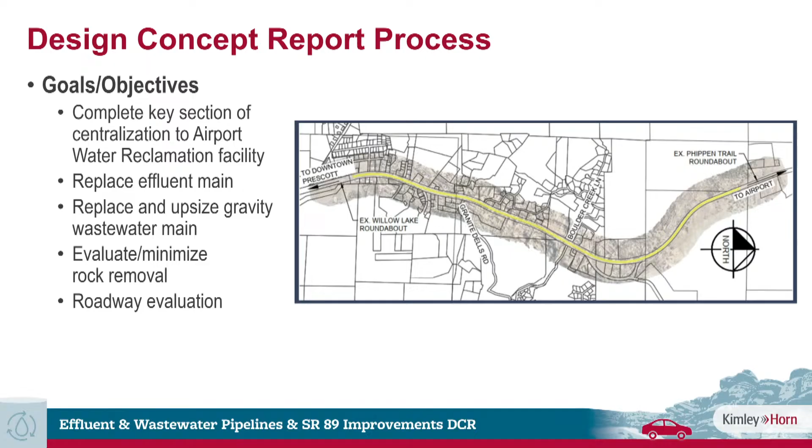So the design concept report process—as Gwen stated, we are about in the middle, or 2/3 of the way done. We are through the alternative development and evaluation stage.

First step is data collection: traffic, geotechnical, utility, topography, and existing right-of-way. We flew the job with a drone in December to lay out the ultimate topography. We have lined up all the existing right-of-way, so we know where everything falls in terms of existing conditions. Utilities we've mapped, using some of the breaks that occurred over the last year to actually map out existing utilities, as well as our geotechnical team to locate some utilities through the corridor. And traffic, we've done a significant amount of evaluation there.

Modeling and analysis, we're about 2/3 of the way done with that as well. We will be submitting a final traffic impact analysis and a final geotechnical report with the DCR. But we've got enough information right now to confidently present the alternatives recommended based on the data and analysis we've collected thus far.

We had originally scoped a minimum of 15 alternatives, but as we developed them, we landed ultimately on 20. The technical committee reviewed all 20 alternatives we put together, with weighted criteria by the advisory group, scoring by the tech committee, and 3 alternatives that scored the highest, as well as discussion on an additional alternative to be considered.

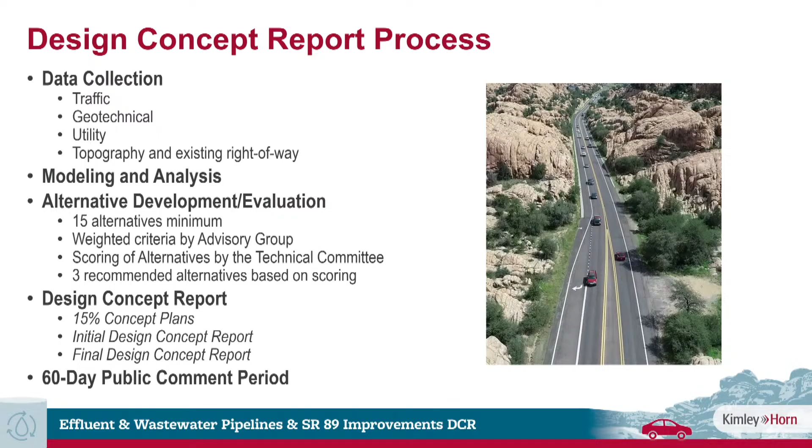The design concept report is the next phase. We will be submitting 15% plans for the 3 alternatives, an initial design concept report, then a final, and that falls within the window of the 60-day public comment period, which will occur later in the project. Any questions on that process?

The images on the screen right now are the 2 breaks that occurred last year. We know the pipeline is failing—it's been failing over the last 6 years. Two different types: the breaks are the same, but the impacts to the roadway are a little different. What we've noted is that this is Ameron pipe, a type of bar-wrapped concrete cylinder pipe subject to corrosion, which is not good when you're working with a wastewater line, an effluent line.

But we're also finding issues with how it was actually backfilled and bedded. As we expose these breaks, we're finding large, angular rock loading onto the pipe itself and causing these breaks from the outside. You can see the pipe on the left in July 2024—that pipe is shredded. Once it breaks, the pressure in the line starts to eat at it as well, but what we're finding is that it stems from the bedding over the top of the pipe.

The December '24 break impacted the roadway much more than the July '24 break. In addition to replacing the section of pipe that broke, the roadway was undermined so much that we had to close it and repave that section as well. It occurred in the narrowest section of the project, so to do the work we had to close the highway, as opposed to the July break where we were able to work within the highway while it was still operating.

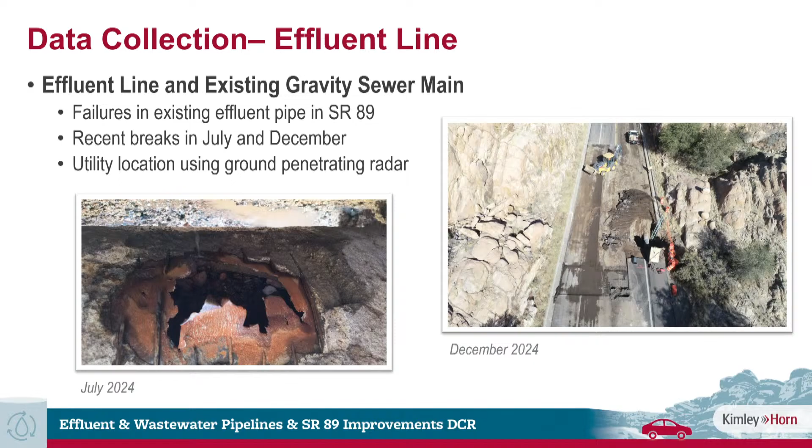What is on the left is one of the traffic tools we are using. It's called traction data. It actually tracks travel times throughout a specific corridor. And so we apply these routes to specific corridors that are going to be impacted by this project.

So obviously SR89, but we're also looking at Willow Creek Road as well. This segment is SR89 northbound from Prescott Lakes Parkway to 89A. What is shown in red and yellow along the bottom is a typical weekday where traffic duration to run this section of the corridor takes a little over 6 minutes. You can see a subtle peak in the PM, and I think it's the way the graphic is set up with the vertical axis going up to 15 minutes.

Along the vertical axis is duration, and along the horizontal axis is time of day. The colors in blue and green are the actual travel times while traffic was detoured and that main was being replaced. In the PM peak period, when commuters are coming home for the day, the traffic spiked up almost 15 minutes—a three-time duration along that section of the corridor, which makes sense, right?

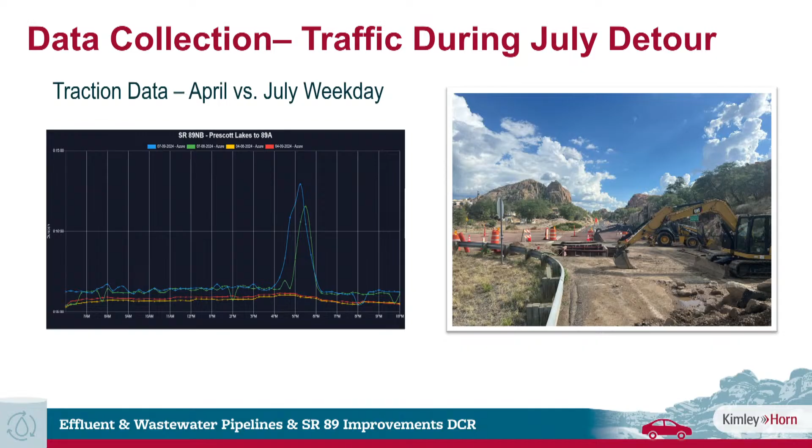We've detoured the road. We had to slow them down to about 5 miles an hour as you navigated that curve. But what we're using these detours for is to gather information in terms of projecting what it would be like as you start to rebuild a new effluent line, a new wastewater line in that corridor.

So these are snapshots in time of what traffic would look like if we have to run a detour condition to construct a facility that's almost 2 miles long, and you have to do that twice with the effluent line and the new wastewater. So we can gauge the impacts to traffic with replacing an effluent line and project that out as we look at maintenance of traffic and construction timeframes through the corridor. Any questions on that data collection or that graphic?

So next was a little different of a detour, to say the least. This was December when the entire highway had to be closed to patch up that section of the effluent line. We took our drones out there and captured aerial imagery of Willow Creek Road, which was ultimately what was posted as the detour route.

As you can see, and as expected, it was gridlock almost all the way to the highway to the north and south, all the way to Willow Lake Road. We also got out there and got traffic counts to look at the volume of cars that were rerouted, to see where traffic is choosing to disperse when we close 89.

There's obviously other routes you can take to get to your destination. You can take Willow Creek Road, which was what was posted, or you can go on Williamson Valley Road, perhaps Glassford. In a future slide I'll show, we were able to capture where traffic was going there.

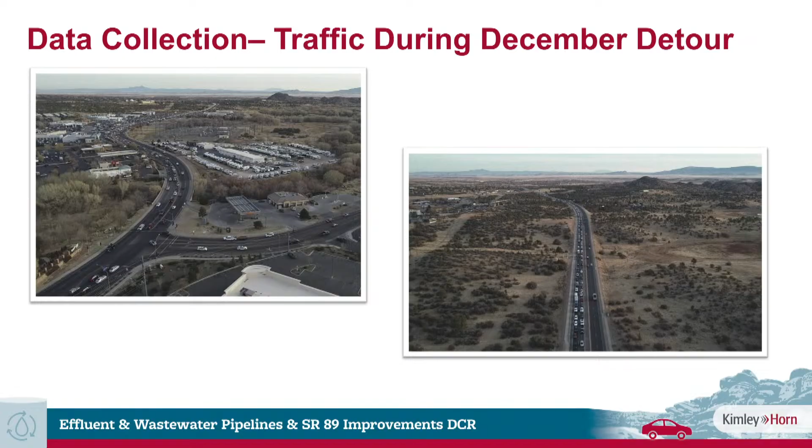So just a quick step back in terms of data collection that we're pulling. I'd already briefly mentioned the data we were collecting during those detours. But we use a series of tools to get a whole picture of the traffic through the corridor. Number one is traffic counts—very simple. Count the number of cars in a peak hour, in a day, and start to look at big picture level of service on a roadway.

As we get to D, E, and F, flow goes from stable to unstable to forced flow, and that's when we start to hit gridlock. Unstable flow is when you can have a corridor with enough capacity in the highway itself—and that's what we're finding with this section—but there is little to no room for side streets to get access. Once those cars make their way into the queuing on the highway, you can see the instability of that network, where one car can really impact traffic upstream.

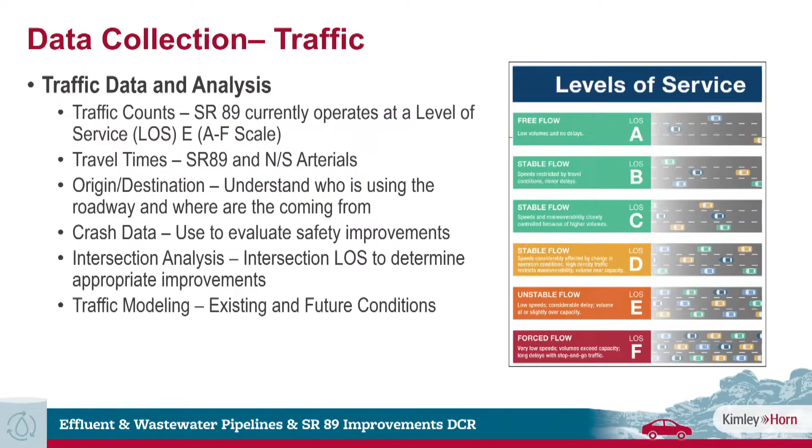That happens two or three times down a corridor, and now you're into this forced flow and gridlock condition. So where we're operating right now with the existing highway is at level of service E, that unstable flow where you're driving the corridor in the morning with a car maybe one second ahead of you. You feel like you're in free flow, but there's no gaps for other cars on the side streets to connect to that roadway. We're running out of capacity, and we'll talk through overall level of service based on our counts. Any questions on level of service and how that relates?

Did you compare your analysis with the CYMPO analysis published five years or so ago? Yes, that's a couple slides from now. I'll go through the comparisons. Their estimate of growth and traffic growth, I think, was a little overly conservative. Because we're already hitting the 2030 levels already.

Yes, and that intersection of Willow Lake and Willow Creek - I made this comment publicly and even in some of my comments in the Courier - if you want to know what we're going to be looking like in a couple of years if we don't widen 89, then that three or four signal light change trying to get through the Willow Lake, Willow Creek intersection is going to be a common occurrence. And when that happens, people get desperate to try to get to work on time or some other reason, and they start making really dangerous traffic moves. So I think there's no doubt in my mind that we have to have a widened section there.

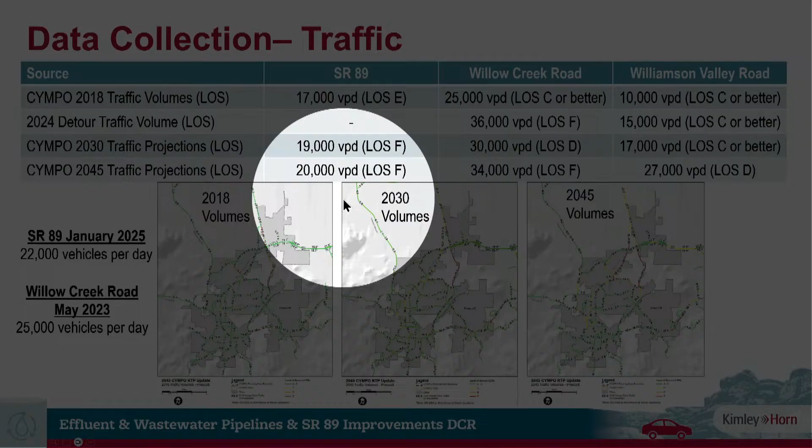Now I'm going to use this, which I just learned how to use today — should be fun. What I'll point you to is the SR89 numbers in terms of the CYMPO projected model for 2045, which is 20,000 vehicles per day. What's shown in the table at the top is 2018 volumes taken at that time, projecting out to 2030 and 2045. In the middle are the 2024 detour volumes I discussed. As you look at it, in 2045 they projected 20,000 vehicles, but we're already counting 22,000 vehicles in January of 2025. So we've exceeded the 2045 projected volumes on SR89.

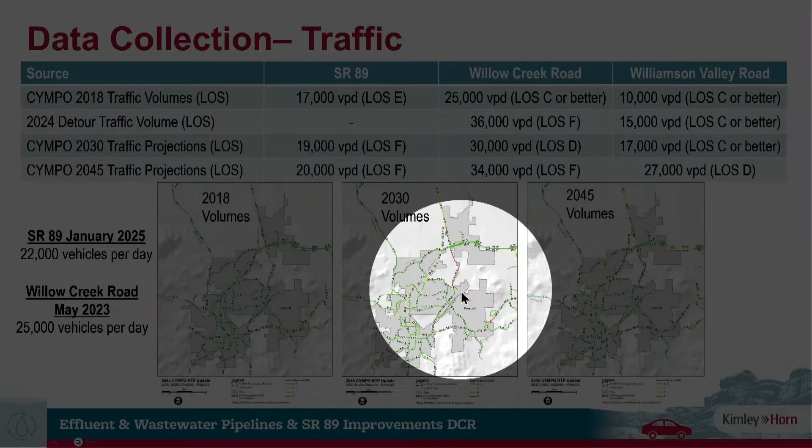This was mapped out — one day I'll get good at this, first time learning. Right here we're looking at the color codes again for level of service D, E, and F. This is looking at 89 and Willow Creek Road, the two primary north-south corridors for traffic volumes.

CYMPO was projecting that by 2030, 89 was already going to be at level of service F, and Willow Creek Road was going to be close behind in those projections too, getting close to 34,000 vehicles by 2045. Interestingly, during that detour we counted 36,000 vehicles on Willow Creek Road. So while we closed a major north-south route, what travelers experienced was a failing roadway that's projected in a model that is conservative at best.

I think Ian Mattingly spoke of this a year and a half ago — not only thinking of your highway in terms of north-south movement around one corridor, but looking at all your north-south capacity across all arterials and highways. You're running out of volume and capacity on those roadways, and that's evident when we have to close two lanes of travel — you're at gridlock on your major arterial coming through town.

So we're looking at this not only in terms of traffic, but what's going to happen when we have to build the needed infrastructure — the effluent and wastewater line. That has to happen. You have to build it within a section of existing roadway, and you have to do something with traffic.

Again, to the mayor's point, we tracked 36,000 vehicles, so they added 11,000 of the 22,000. Williamson Valley Road saw an additional 5,000 during the detour, so the rest likely went down 69. The remaining 6,000 to 7,000 were using 69, which was under construction, and perhaps they went down Glassford and overloaded that roadway as well.

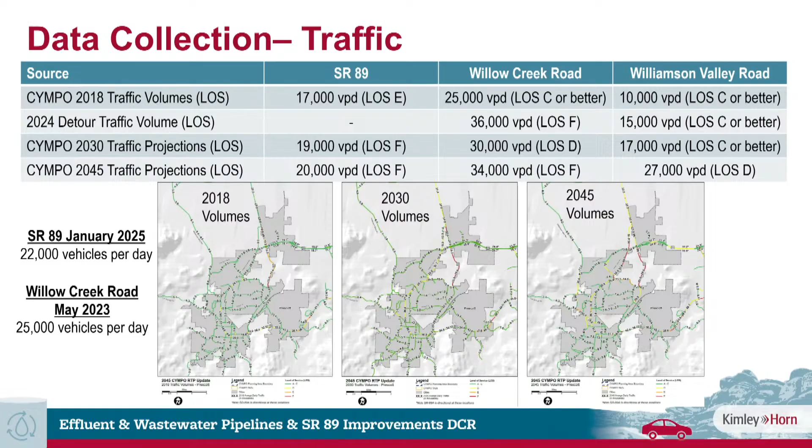Part of the problem is you're connecting a 4-lane arterial to a 2-lane highway with a 2-lane roadway, and often that gets overtaxed trying to reroute traffic. We saw that when looking at detours - northbound travel detouring on Willow Lake Road was severely congested in the PM. Then on Willow Creek Road northbound with 2 lanes, it was more free-flowing. So you have capacity concerns when you link 2 major roadways with a smaller collector street - you create a bottleneck, and that's what Willow Lake Road serves, especially at that intersection.

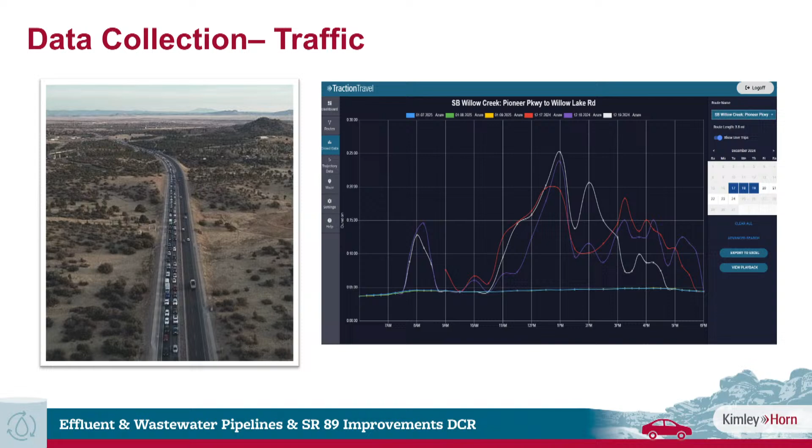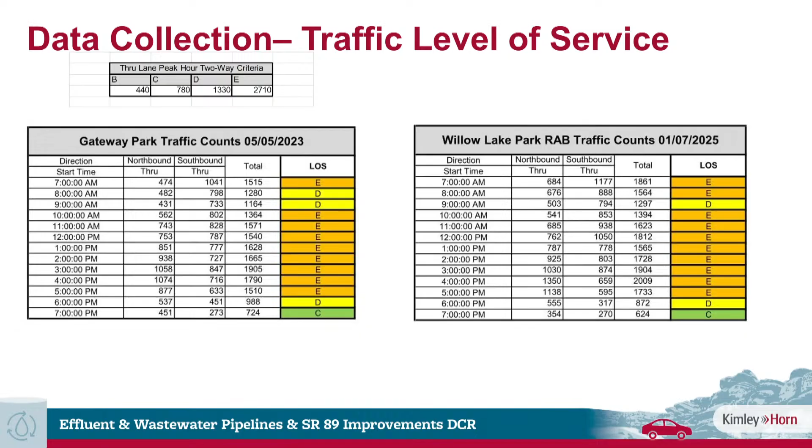So we did counts in May of 23 as part of the analysis for the potential future park. And then we did counts again in January 25, very similar in terms of volume, but you see we actually have an E that lasts a little longer into that 8 to 9 window on the graphic on the right.

This was some of the questions that came up as we talked through with the technical committee and the advisory group, looking at the big picture level of service on a given volume of traffic for a day, but then also the breakdowns in terms of two-way traffic throughout the day. And we're seeing that the roadway is consistently in that level E unstable flow based on volumes.

One thing to clarify, which came up in both the advisory group meeting and the technical committee, is that these are planning level of services. These are basic capacities of lanes, of two-way highways, 4-lane highways. As we start to look at this, level of service gets more complicated, and that's what our traffic impact analysis will include, in terms of speeds, geometry, impacts from side streets, and an overall picture of level of service through the corridor and at the intersection.

So some questions came up that these are almost too rudimentary to state as the end-all-be-all level of service, but these are from a planning level in terms of lane capacity, the level of service of a two-way highway. As we expand on the report it'll be more refined, but the big picture is you're operating at a level of service E right now, and the data is showing that.

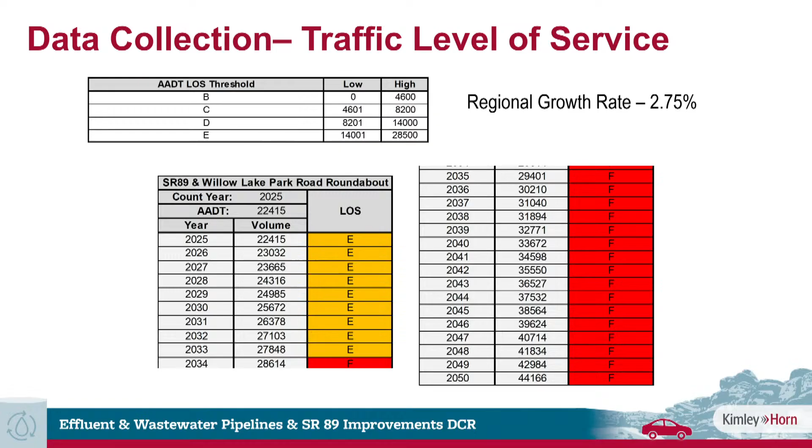To put this in perspective, this is on a 2-lane highway. A 4-lane highway has a capacity that stays in that level of service C or D range of about 45,000 cars. So you would meet this capacity in 25 years if this growth rate continues, if you see the same volume still continue to grow on that highway. You would be in that C/D category, so going from that stable flow into unstable flow, but that's 25 years out. So that's just the capacity of 4 lanes versus 2 lanes.

Big picture, again, it's a big picture level of service in terms of just corridor level of service on a highway. Looks like you need some more Fs.

Maybe a double F or a triple F. I tried to just keep going this table all the way to like 2090, and staff rightfully said, all right, enough red and Fs, buddy.

Any questions on our projections?

And so as mentioned, this is just a snapshot of the crash data that's available on the dashboard. Anybody can get in there on the website and look at it by year, by type, by time of day, so it's an interactive dashboard. What this is just really showing here is kind of big picture collision manners. This data goes back 2019 through 2023. Normally you get published crash data from the year before, about 6 months later after it's all processed, so we'll be able to update this with 2024 data probably in the next 2 months.

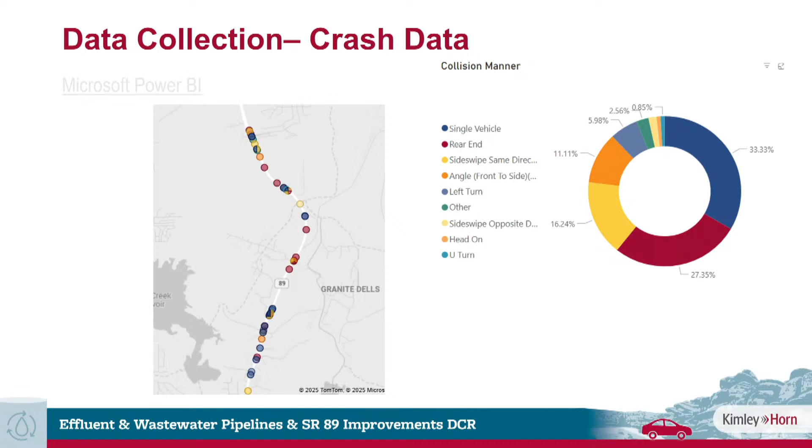Similar to crash data, we collected origin destination data using a software called Streetlight. This is able to use connected vehicles or the GPS in your phone, as well as census data, to really get a full picture of where everybody's starting, where they're going, are they working, are they visitors, are they retired. The big thing from this graphic is that over 85% of vehicle trips are coming from 5 to 30 miles as they pass through this section of the highway.

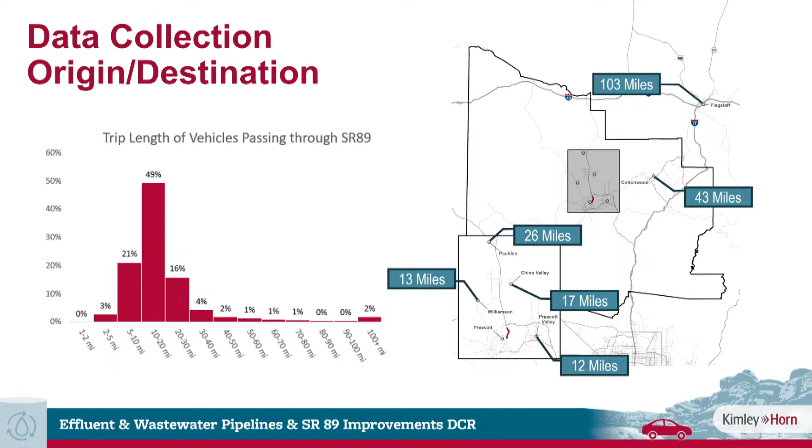So 85% of trips are between 5 to 30 miles away, and they pass through SR 89. Put that in perspective on the map: Williamson Valley 13 miles, Paulden 26 miles, Chino Valley 17 miles, Prescott Valley 12 miles, all the way up to Cottonwood 43 miles in the county. So again, this is a regional road, not just local traffic. This is a highway where we're having people come from Chino Valley, from Prescott Valley, and that's evident by a simple origin destination analysis of where people are coming from and where they're ultimately going. We know this through GPS technology that tells us where everyone is traveling and their origins and destinations.

That graphic was pretty eye-opening, to learn that people came from so far away. What technology do you have to use it, and is that the same technology they used to lock up Granny on January 6th?

I'll answer the first part of that question, hopefully. So yeah, it's using your phones or the GPS in your vehicles. What we do is we broke it down on the next slide, by zip code. We basically set up a polyline or a geofence that shows once someone starts from a given origin and lands at a destination, that's one vehicle trip. We ultimately add all that up, for example, people coming from Chino Valley into Prescott, and we can pull that information.

That's primarily from, nowadays, cars that have GPS built in, or your cell phone. If the car did not have GPS and you did not have a cell phone in it, you still would be caught, because what they do is pool all this data together and create an algorithm that accounts for those that don't have that, so we're not missing that trip. This goes back to census data in terms of those that maybe don't have this technology, and we add that in.

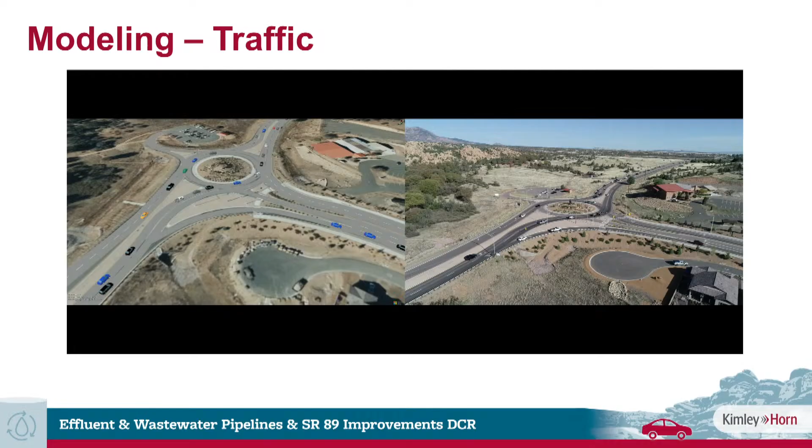Ultimately, all of this data gets rolled into our traffic model. What I'm going to share is just the base condition model. On the left is our VISSIM model, which we use, where we put together traffic counts and travel times, and we actually calibrate it within a certain number of standards that must be met before we can say this baseline model is accurate. On the right is actual drone data from a similar time, an AM peak right around just ahead of 8 a.m., hopefully.

So it's one thing to just initially note it's very similar. It's not going to be exact because we're not just running out there doing videos and matching the model to a video. We're ground checking this, so you can see a significant number of traffic coming in from the south.

One thing that's been brought up as a mitigation factor is that transition into a single lane coming out of the roundabout ultimately needs to be extended. That's too short, and that's creating some bottlenecking coming right out of the departure side of the roundabout.

You'll see some examples as vehicles enter the roundabout, just a small snapshot of what that does in terms of unstable flow. One car came through on the right and it created several more cars having to stop. If you repeat that as development comes and more cars enter the roundabout, that's going to be exacerbated upstream the more traffic you add.

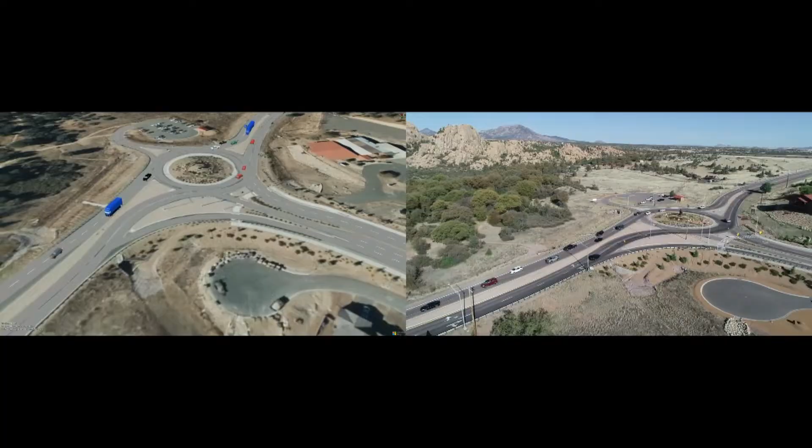When you look at this, it looks pretty free flow, but what I see is almost zero capacity on the roadway. You've got cars basically platooning all the way into town.

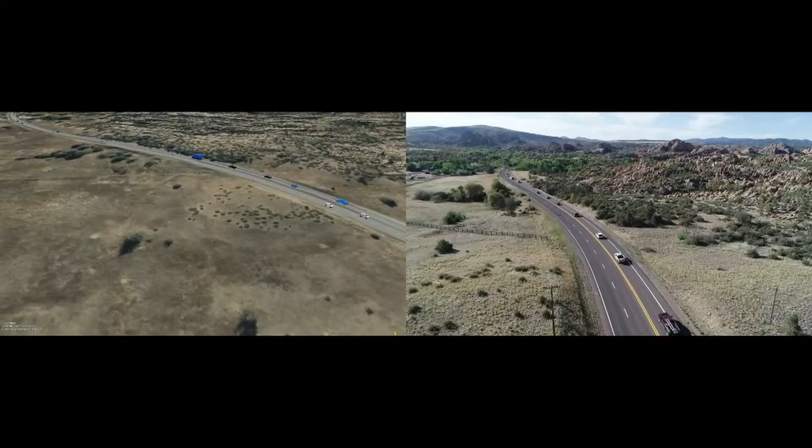Obviously we have no side streets coming in here, but as we get through areas where you have connected driveways and streets trying to interact, this is where you have zero gap times, and people have to wait a significant amount of time to get on the roadway. This is where level of service gets more complicated, because we can't just look at throughput along the highway itself, but how these side streets are interacting with the traffic.

But very similar in terms of what you see on the actual video on the right.

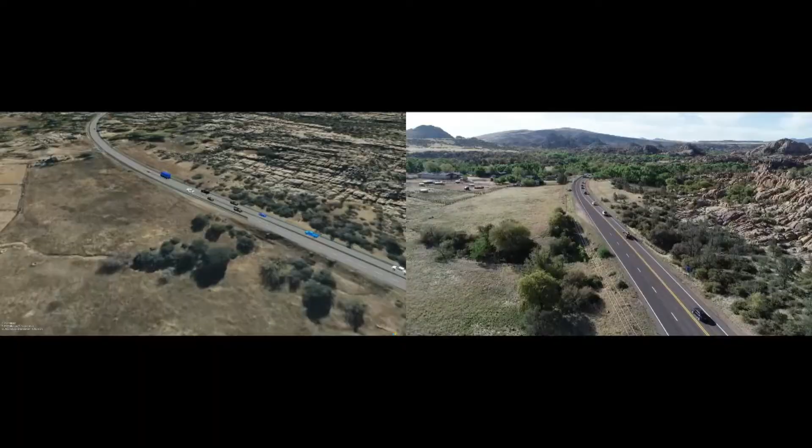Councilwoman Furworth. Thank you, Mayor.

I love the modeling data, and I wonder if we could model what would happen if other businesses or other kinds of infrastructure were built on the sides around the traffic circles, and what that might do to the danger or accident level in our circles. Would you be able to do something like that with this modeling?

Yeah, you can. For example, if you know a development's coming that's going to add 100 units and they have to tie in, that goes 100 times 7 trips, so you've got 700 trips throughout the day. We can add that and show what that would look like in terms of a scenario.

Most of the time the right-of-way comes to those on the highway, and so all it would really show is a significant amount of queuing.

And in this model you can actually tweak the aggression of the driver. You set it to a gap time of 5 seconds, but you can calibrate it down to 1 or 2, and watch what that looks like. As you start to wait longer and longer, you get more aggressive, and I've seen models where you can see near collisions that get modeled, which is something you could possibly expect.

And modeling vehicles that have flashing lights and sirens, could that all be added to the chaos of the modeling? We'll just color code them red. Okay, that would be good. Thank you, we'll call that flashing.

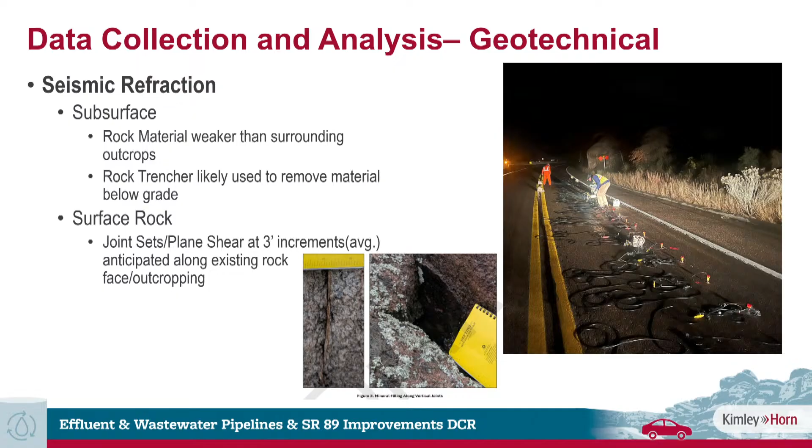flexibility in that 3-foot increment on average. As we start to shape potential alternatives for roadway improvements, we can line that up with some of these shear zones and really reduce the amount of removal necessary to get the number of lanes that are ultimately required. But again, this is a pretty complicated effort to complete, and they're about halfway done with this evaluation. The field work's done, but they sent it to the lab, and then they're going to come back out in early May and run some additional boots on the ground testing just to get a better idea of it.

We also did borings within the corridor - you can see the graphic on the top right showing where we completed our 10 borings. We're boring down until we hit rock. The good news from the roadway corridor is the rock depth varied from 3.5 to 9 feet. Since the effluent line is a pressure system, we can vary that depth to stay out of rock areas, but a gravity line may get deeper into that 9-foot zone. So we will be trenching through rock, but the depth wasn't as shallow as we originally anticipated.

The bad news is specifically through the narrow section, borings 3 through 7, we found no determinable aggregate base layer. From a structural standpoint, a roadway consists of two structures: your surface course, the asphaltic concrete layer, and your aggregate base layer. That makes up your structural section, which gives you a structural number based on the number of cars on a roadway. At minimum, based on existing traffic of 22,000 cars per day, we need 6 inches of AC on 10 inches of AB.

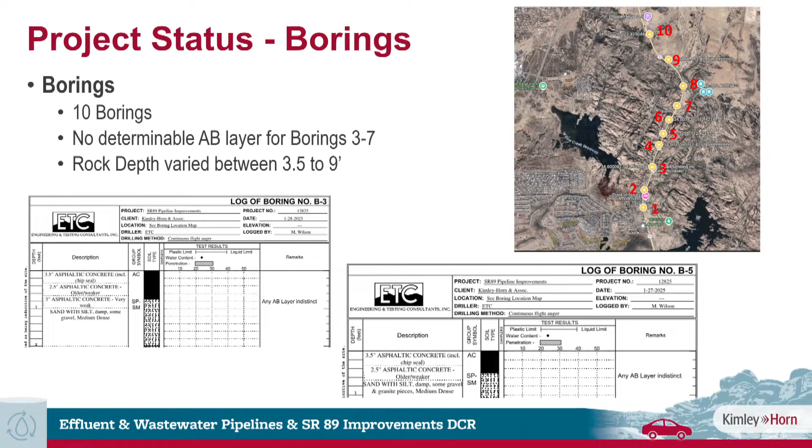Correct me if I'm wrong, but it sounds like you're saying that based upon the subsurface condition of those pipes and the shading that you encountered, we'll probably have to expect continuing failure periodically throughout until we have a final solution.

You will have continued failure until it's fully replaced, bedded properly, and you have a sufficient roadway structure over it to account for the traffic loading that's occurring. Yes.

So we've gone through that. It's kind of a three-part, not to be a Debbie Downer, but almost a three-part failure. You've got the existing structural section that is not meeting any sort of requirement. You've got your roadway from a lane capacity standpoint nearing failure, or will be in the next 8 to 9 years. And we've already shown the effluent line that broke twice last year. This is why over the last 3-4 months we've gone to this effort level to collect all this data, to understand exactly what you have and start to make recommended improvements, as I'll go through in the next slides, based on what our advisory group and technical committee came up with. But from a fact-finding standpoint, you've got a three-part failure in this corridor right now.

Man, everyone's so down. Sorry. It's so quiet. Oh man. Awkward pause. Let's move on to the next slide.

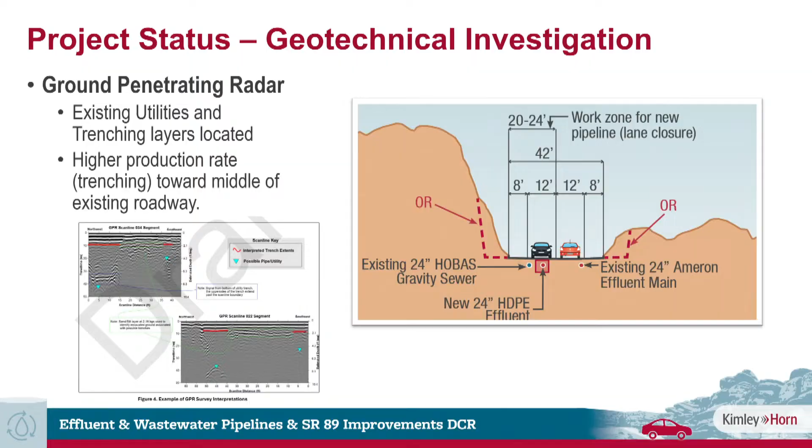And so that's why those two lines we're looking at, and again, going back to if we're finding these layers and these shear zones where we can shear off some of that rock that was already widened to build the roadway itself and match that pattern as you start to expand, you can maintain traffic on one side and really start to reduce the impact of those travelers. There's still going to be impact no matter what. This is a major undertaking through this section, but starting to look at different opportunities for combining the two needs in a cohesive project. And so that's what that dashed line is looking at.

So that is the end of the data collection, and now we'll talk through the advisory group and tech committee process. These slides are not as exciting because we just have pictures of us in a classroom and a lot of words. So I apologize for closing with boring slides.

As everyone knows, in November we had talked through getting a 15-member advisory group, and that's ultimately who was brought on board. I think some are in attendance today, and I want to offer thanks. They were really committed to this process through the 3 meetings we held. Their objective was to weigh the criteria. We had 10 specific criteria, all starting at 10% of the overall, and ultimately through this process we established the weighted criteria that the alternatives were scored against.

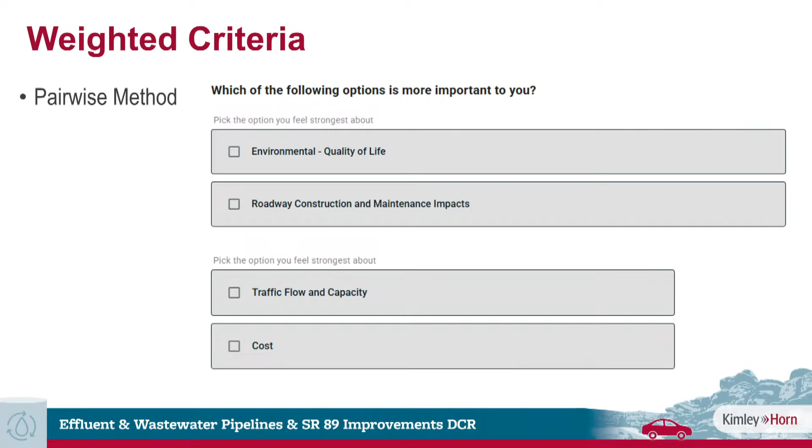Pairwise is pretty simple. We have a series of 10 criteria. We evaluate each one against each other once, and each group member will have their priorities set based on a simple question of picking the option they feel the strongest about. Is it environmental quality of life, or roadway construction and maintenance impacts? Similarly, next question would be traffic flow and capacity versus cost. You repeat this 45 times, very simple. Then in the end, you individually have your priorities and weighting, and we average that out over the 15 and determine in real time what that criteria is.

We completed the exercise in advisory group meeting number 2, minus 2 people who could not attend, and they did it online later. We had initial weight scoring at that meeting, and then 2 days later it was completed, and the results were sent out to the advisory group members, as well as the raw data sent to them individually, so you could go back and truth check your scoring and confirm it matches what you put together.

This is ultimately where those percentages landed, in order from highest to lowest. You see vehicular safety at 14.2%, environmental quality of life at 12.8%, all the way through traffic flow and capacity at 12.2%, environmental view shed at 9.4%, and then down through constructability and long-term maintenance impacts at the lower end, with cost coming in at 4.2%. You can do the math, it adds up to 100%. Yeah, Gwen was pumped about that one.

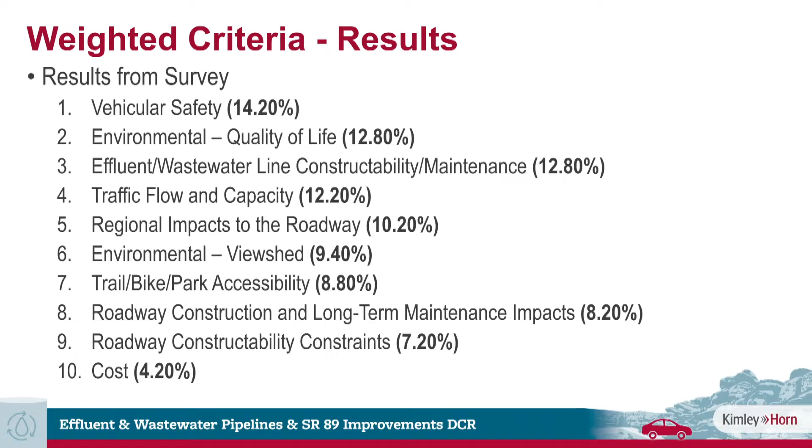We had a cross-section of community members completing this exercise, and everyone completed that in real time. We were able to answer any questions that came through there and after, and then we used the third meeting to reiterate the results and discuss ultimately the alternatives we're moving forward with.

Any questions on these results? I know these are boring, they're just percentages and letters. Oh, this one's worse—look at all these words.

As I indicated earlier, we ended up evaluating 20 alternatives in total, done concurrently with our data collection. Our team used some of the recommendations that came out of the surveys from the end of 2023, as well as those public meetings, and then generated some of our own based on findings in the data. This is broken down into 3 specifics of the 20.

So we had required improvements—these are improvements that must be done. Sightlines is one; you have to be able to see down a highway so you can make a turning movement, which requires removal of vegetation or rock. We also looked at the southbound Willow Lake roundabout approach and the fact that it doesn't have a reverse curve coming in to slow traffic down.

And so we took the opportunity to look at shifting the roadway over to the west. Concurrently, the frontage road in front of those several businesses just north of the Willow Lake Road roundabout - the proposal is to consolidate those driveways into one and tie them into a frontage road that ties into the next adjacent street.

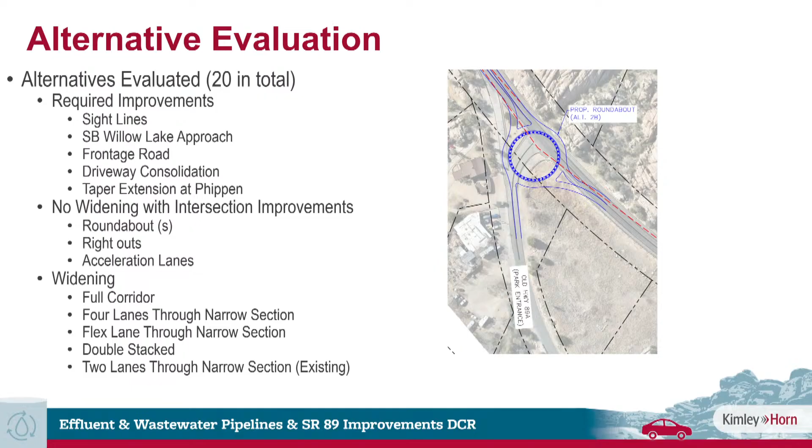So the no widening option was looking at roundabouts at several locations as well as right-outs. If we couldn't get a roundabout or anywhere to turn around at right-outs, we looked at acceleration lanes specifically for higher volume side streets that would benefit. This goes back again to that 90-second car that was waiting to make a left. If they had an acceleration lane, they could actually just wait for a gap in the northbound travel and not worry about finding a gap that lines up in 2 ways of traffic.

So we looked at these individually in terms of number 1 benefit - let's have people turn right. Number 2, let's give them an acceleration lane in the median to allow for a reduced potential conflict. You don't have to cross 4 lanes or 2 lanes of traffic, you would just have to cross 1.

Then widening was actually broken into 2 specific segments. Widening was the full corridor - let's just look at it from 5 lanes all the way through the whole project limits. That's the only one that is strictly widening all the way to 2 lanes in each direction with a separated median and then shoulders. That's the maximum improvement. So we mentioned again shoulders in terms of those being a mitigation factor for some of those accidents, as well as, as we brought up earlier, emergency response.

If you've got lanes of travel that are congested and you've got to get police or fire through there, you can have vehicles actually pull off on the shoulder and make space for some of those emergency responses. So there's obviously an added benefit there as well.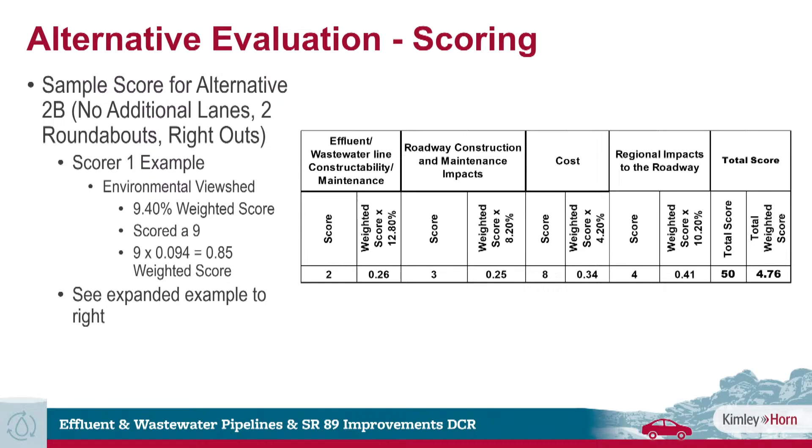Vice versa, the advisory group was responsible for the weighted criteria. We did not discuss alternatives with them until after that exercise. We kept these both separate so we could come up with an overall score.

So briefly again, the technical committee was made up of 5 members - 5 technical professionals and a senior infrastructure analyst. We had a geotechnical engineer, city traffic engineer, the city engineer, an infrastructure analyst, and a representative from County Public Works - a cross-section of technical leads able to come in and look at these alternatives and score them against the criteria from a technical perspective.

We met on March 5th and March 12th. Similar to the advisory group meeting, March 5th was discussing the alternatives, introduction to the process, and talking about schedule for getting the review and scoring back to us. Then ultimately we had the March 12th meeting after they had the information for a week. We were able to have a 2-hour meeting where we discussed any questions specifically on the data, anything specifically on what a certain alternative meant, and we went over their specific questions.

Then 2 days later, they submitted their scoring sheets, and we ran it through the weighted criteria and ultimately came up with the 3 recommended alternatives from that scoring.

And just to clarify again, it might look like these numbers are pretty tight, but this is a scoring out of 10. So, Councilman Gambogi had a question. Yep.

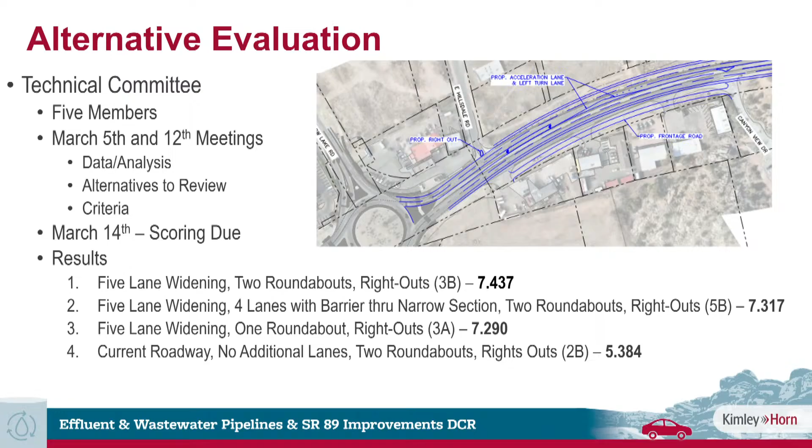That's the 5 lanes—12-foot total median. Yep, a center left turn or a center striped median. One of the things we're still exploring is certain areas where we might want to convert that to a raised median, especially where driveways narrow in. Okay, gotcha, thank you.

Councilman Gambogi. Many times I've said that whatever we're considering is not a standalone issue. You could see from your analysis earlier, because people can't afford to live in Prescott, we have a lot of traffic coming down Willow Creek and 89. Just recently we passed Proposition 478, where Fire Chief Holger Durr was going to build some fire stations. Where would the fire stations be related to this 89? And how does that impact these 4 results?

It's all yours, I guess that's my cue. Fire Chief Holger Durr: yes, good question.

Right now we are looking at locations adjacent to both the Watson Lake Roundabout as well as the one near the Phippen Trailhead. Currently we're looking at city-owned land, probably the northeast corner of the Watson Lake Roundabout. And the other one is near the Phippen Trailhead, at a location still to be determined, but they would be adjacent to both of those traffic circles at this point.